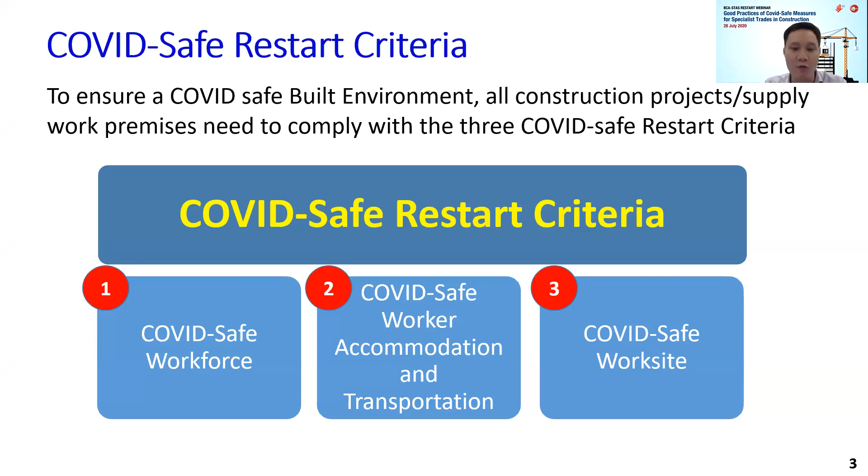All right, first of all, to date, we have approved about 3,000 work sites or supply work premises for restart. So based on all these restart works, we need to ensure that there's sustainability in terms of ensuring that the sites and the work premises continue to implement the correct measures. So these are the three broad areas that need to be looked at, which is the safe workforce, safe worker accommodation and transportation, and of course, the safe work site.

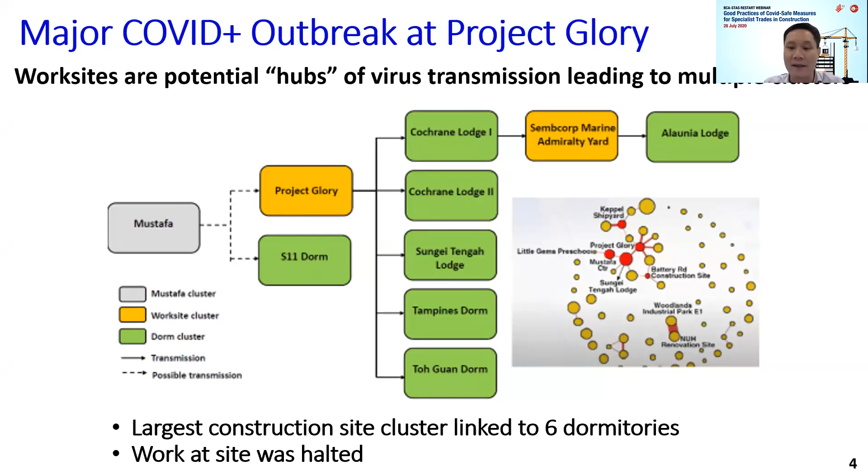Now, Project Glory, this is a reminder for us of the risk that can actually happen. It's a site where there's an arrangement with worker accommodation and work site, linked to 6 dormitories. So when there was an infection, it became the largest construction site cluster, and it reminds us of the risk of COVID.

Currently, there's no vaccine or medicine for COVID. So the real protection we have is to implement the safe management measures, SMM, and to contain any spread quickly when it happens. How well the SMM are observed will be key to avoiding outbreaks at work sites. So BCA has set up an audit and inspection, A&I, team to check on the effectiveness of implementation at the work site and supply work premises. The key objectives are to ensure safe access, safe distancing, and containment.

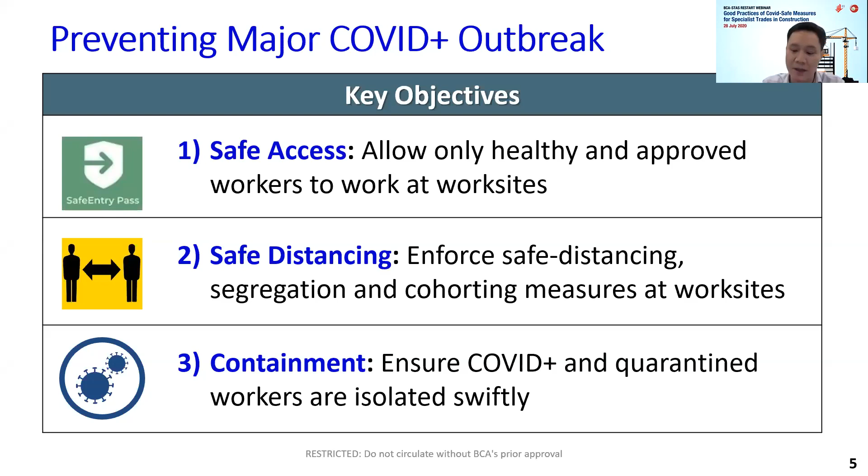So how do we do that? For safe access, essentially what we want is a robust entry control system to make sure the workers who go into the site are actually approved personnel. So if these personnel are ensured to be safe, this aspect is controlled.

The next aspect is safe distancing. This is not unlike what we do in the community. We have safe management officers or safe distancing officers to ensure workers at site are kept within a distance while they work or rest. There will also be segregation of teams and work zones, and when it's time for meals, we want pre-packed meals, and of course to turn on the Trace Together app. So essentially, this is the safe access and safe distancing measures that we want.

So if all this fails, the next aspect we look at is containment. Containment looks into how, if there are suspected or even confirmed cases, what response plans you will have at site.

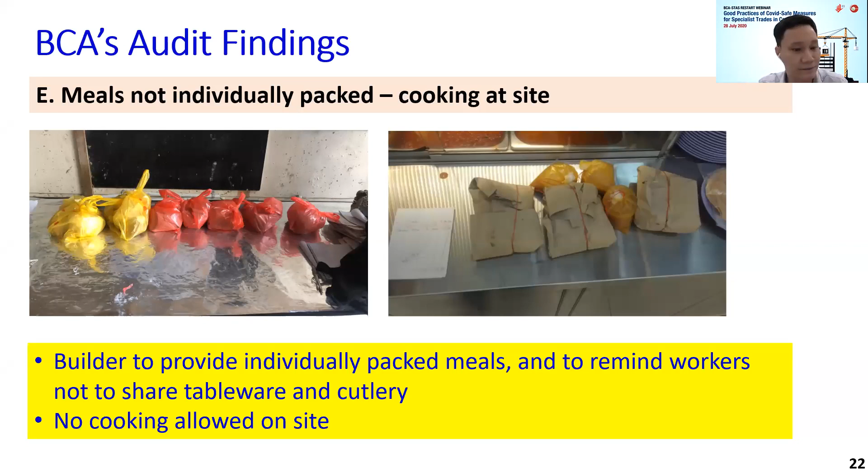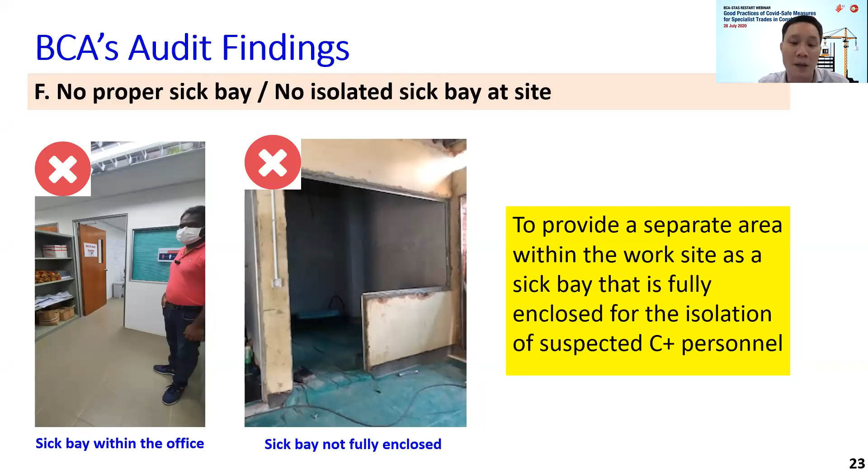Next, no proper sick bay, no isolated sick bay at site. In the event that a worker is found to be sick or infected, there must be a place dedicated for the workers to rest while follow-up action is done to extract him to the clinic. This sick bay should be an isolated place, and it should be well ventilated for the workers' rest.

Now, all personnel should also install the latest TT app on their mobile devices, which will facilitate traceability in the event of positive cases. So in the event that there is an infection, we can ensure proper tracking and tracing of the workers can be done.

I'll touch next on the good practices that we have found on site. These are some of the pictures you can see. There are dedicated entrances and exits for teams. This is something that even in our NTUC, in places of the community, you can see that there is a place to go in and a place to go out. So it's one-way traffic.

There are also clear safe distancing measures and markings done on site, and clear zoning as well. There are appropriate places for digital scanning of temperature devices where the workers can take their temperature daily. As I mentioned, communication is important, so SMOs should brief the SMM measures to the workers on a constant basis.

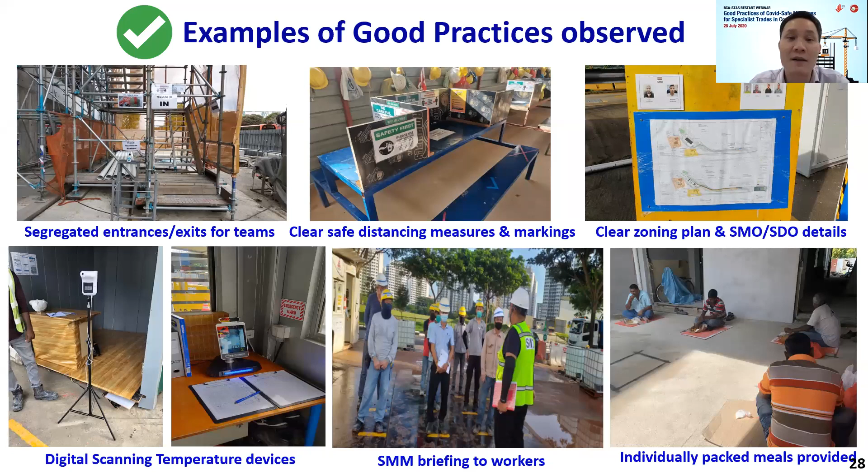And lastly here, showing that workers should also be given individually packed meals during their meal times. Okay, more pictures you can see of some examples of good practices.

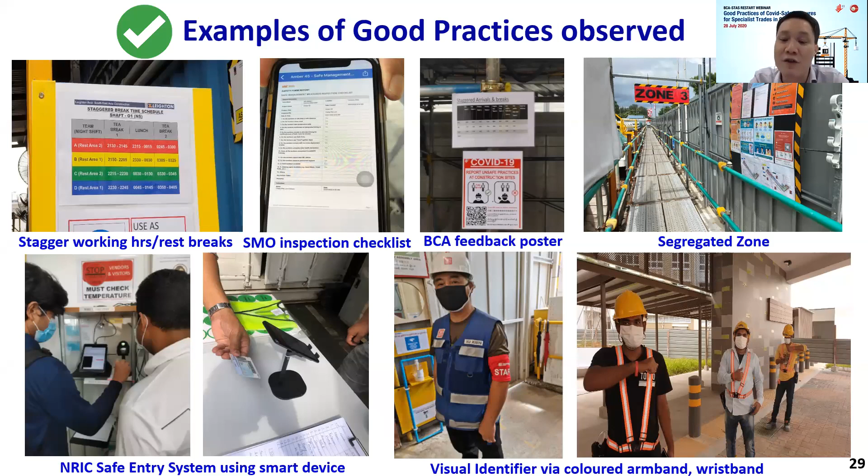We also have some examples of non-compliances. As you can see here, workers are not wearing masks during their work, and there are also situations where workers are found not authorized at site, and the sick bay is not properly provided for. We also come across workers who cook on site, which will end up sharing food.

So based on these non-compliances, based on our BCA audit, BCA will also take enforcement actions from very simple actions such as giving a timeout, stop work order. And if this were to persist, BCA will not hesitate to take up more serious enforcement actions such as giving fines or even up to prosecution actions.

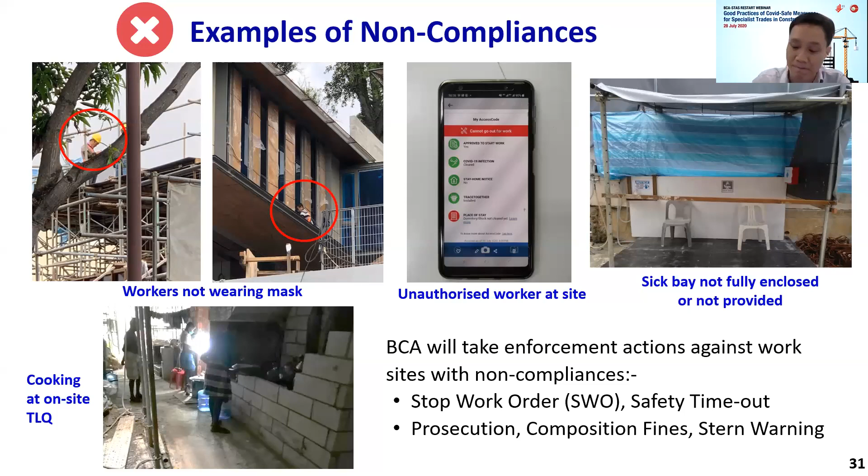So essentially, this is the whole framework of what our SMM regime is. That's all, thank you.

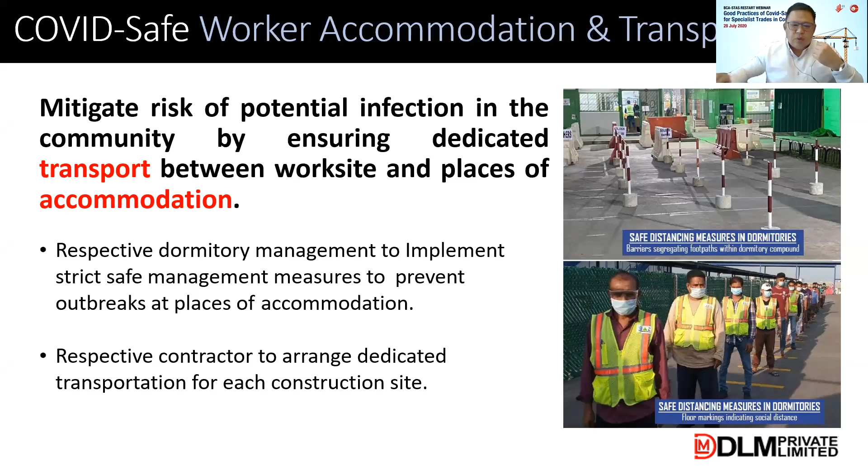On our end, and also for our subcontractors, we have to arrange dedicated transport for our workers, pick them up, and send them to each work site. One vehicle can only go to one work site, and then they will come back to pick up another group.

So we check our workforce. For example, this is a major chiller retrofit project. At the onset, we table out each of our trades and sub-trades, how many workforce we have expected during a particular month - like this is from 2nd June to 14th June - how many people are there from different contractors, and where they are staying. This checks whether they have complied with accommodation clearance, and whether the transportation is able to comply. We remind them how to comply at our onset briefing.

We also assign each of the trade contractors a color, so at the site their helmets will have a band stuck on. This is for us to ensure safe distancing, and when they've been segregated into teams, we are able to monitor them so there's no intermingling.

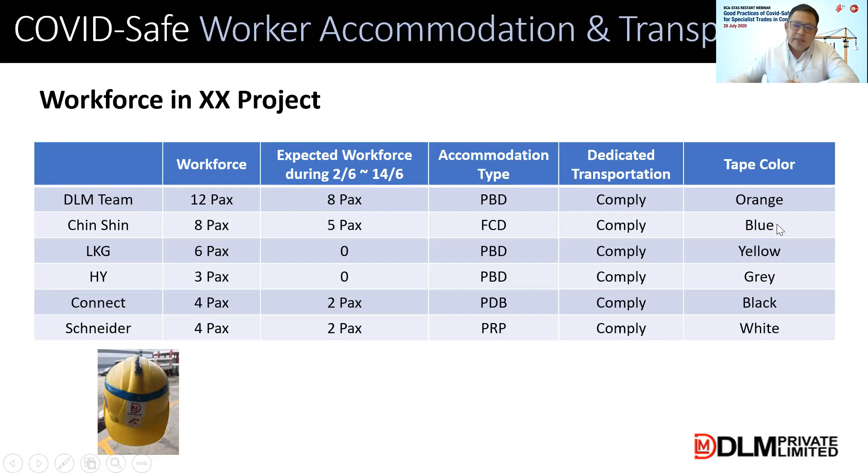At the accommodation, we have to ensure safe distancing between the beds, the rest area, and even for the basins and urinals - either they use alternate ones or unless they can achieve the safe distancing.

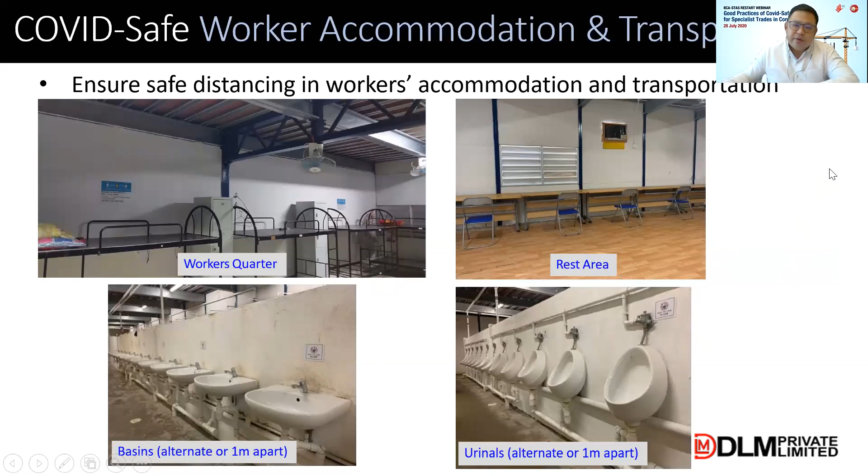In terms of safe transport, I think everyone is quite aware now. LTA has given, and also MOM, requirements to comply with 0.496 meters squared per pax. So a 10-feet lorry can ferry 8 workers.

Each trip can only bring workers to a particular site, and we make sure all the workers on the lorry wear masks. If you have bigger lorries, you can ferry more workers. When they reach each destination, we pass sanitizers and disinfectants to the driver, and the driver will disinfect the vehicle before heading back to pick up the next group.

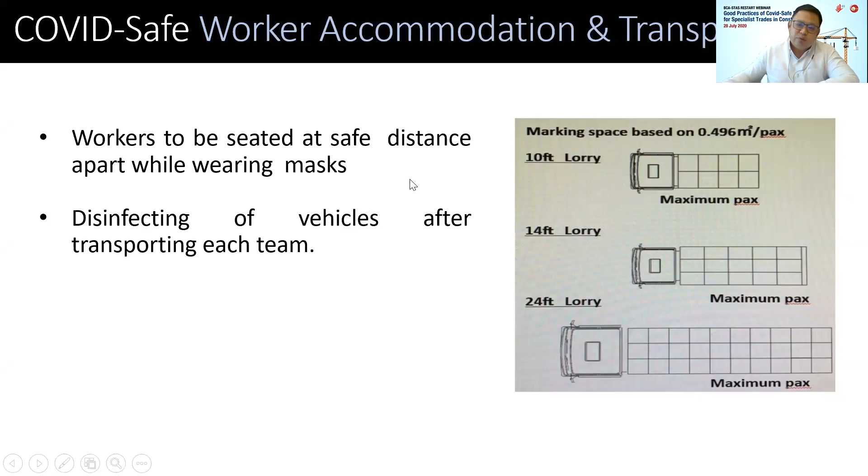Next, I move on to COVID safe work site - how do we manage that at our work site? We have our own SMO and SDO. The SMO is supported by the SDO in implementation on site, and each of the sub-team supervisors will be a COVID safe team leader, ensuring they take care of their sub-team on the site.

This picture here was just taken on 11th of July, just 2 weeks back. So we have a site where people are standing at safe distancing where we conduct toolbox meetings. We make sure that at this toolbox meeting, we tell them and remind them about safe distancing.

Whenever there are latest posters or infographics, we print them out in their native languages and put them at the entrances and rest areas, so the workers have a chance to be reminded and get updated about the measures and the importance of personal hygiene. We also pre-screen the workers' health status besides the access code and temperature taking before entering the sites.

You can have a temperature monitoring system like this. Workers take their temperature twice a day, and it can be recorded automatically, or you can use a thermometer to take their temperature and record it on a form. For the toolbox meeting, we have boxes where they stand at a safe distance. Also, for safe entry, you must use NRIC now in order to enter the site, because this is linked to the access code as mentioned earlier by Jeremy.

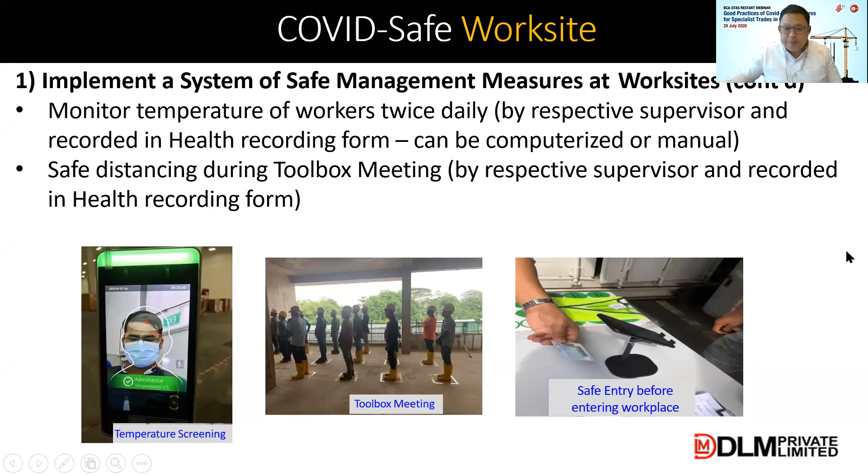So how do we actually reduce physical interaction? One way is to have staggered work hours for breaks. Some workers can come earlier, some groups can come at a later time, and they can also have different break times so that they don't all congregate at the rest area at the same time.

The important thing is we break them into teams, and each team can only work at a single zone. Later I will show you how we do it at one of our job sites. Each team is given a different colored tape on their helmet so it's easy for the SMO and SDO to monitor them.

For this particular project, every Tuesday and third Friday, the SDO and SMO will do a compliance check and also record any non-compliance and corrective action.

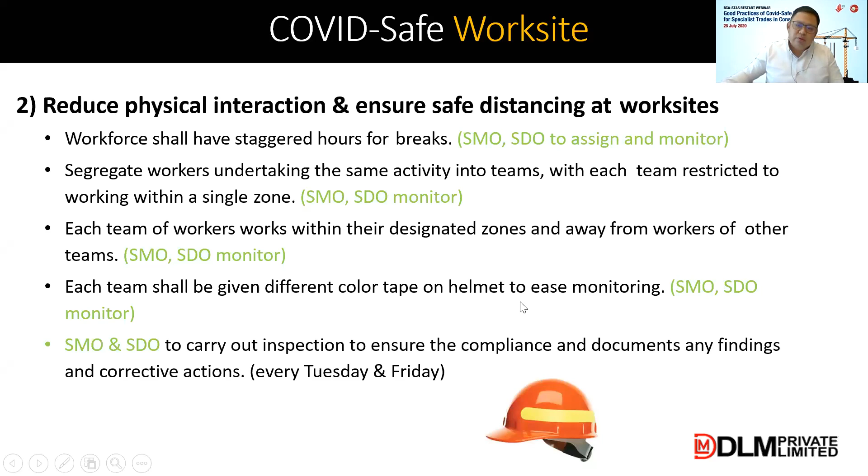This is one of our job sites where we're doing a chiller retrofit. This zone is where a particular trade group can work, and same for this zone - they will never intermingle. The SDO's job, through SMO's inspection, is to ensure that they don't intermingle. They are restricted to their respective work zone.

The following week there may be another change where this work zone and this work zone may interswap, or it could even be a change every 3 days. So depending on your workflow, you can start to restrict work zones at different timings.

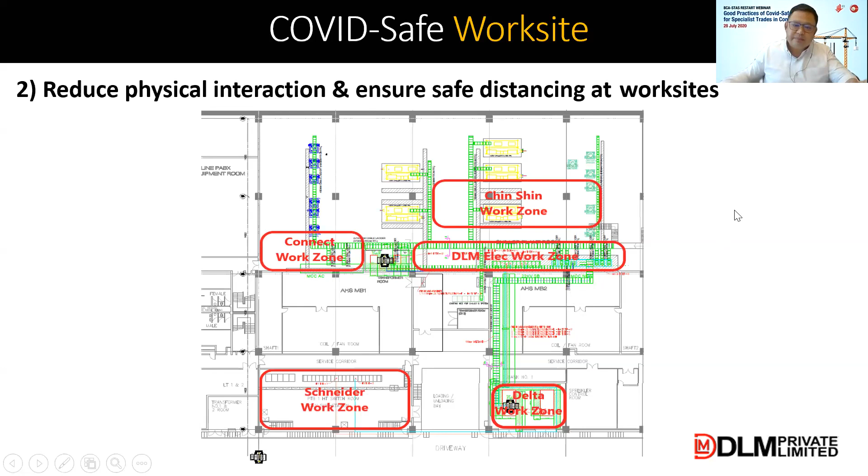We try to minimize our on-site meetings. If we can, we have virtual meetings. If we can't, then the meeting room needs to have safe distancing, same as the outside office, and we try to restrict the number of people that can be in there.

Cleanliness of the work site is also very important, so waste is always disposed of at the end of the day. There's a designated rest area - for example, a loading dock area where we can put up some barriers to designate a rest area. It must be well ventilated and have enough space for workers to spread out.

Sanitizers are provided at the entrance, and workers also use them to wipe down their tools before using them. At best, they try not to share tools - that's what we try to introduce, for every worker to have their own individual tools. But certain heavy duty tools have to be shared, and those will have to be disinfected before use.

Same for material delivery - they wear masks and keep a safe distance from the workers who take over the materials.

Basically, in my company's operation, I feel it was key that I quickly appoint safe management officers. Personally, myself, all my project managers, senior project managers, and directors have all gone for the SMO course held by BCA, and we've all been certified. So we know exactly what safe management measures need to be in place, and we can assist and support our SMO in the implementation of SMM.

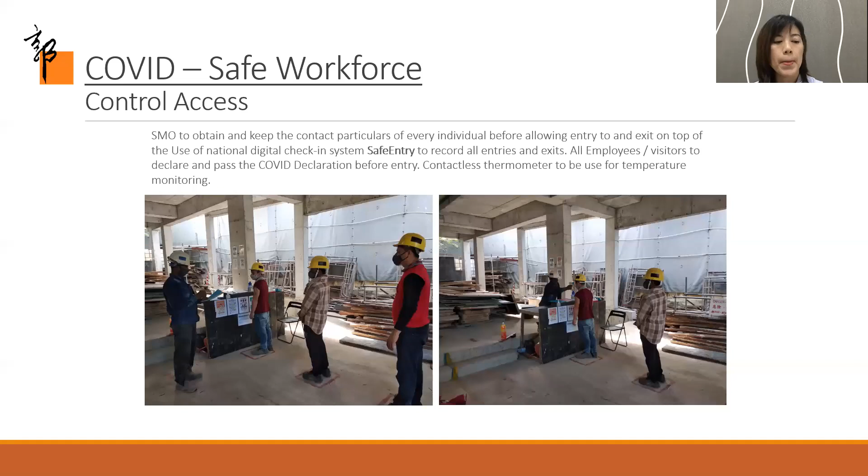You can see that at the SMO counter, and also on the walls, we put up posters to remind everyone about the safe and good practices on site. We also make sure there is sufficient hand sanitizer and soap at the wash area at each entrance and exit of the job site. The housekeeping is done twice a day, which includes cleaning up the job site, removing the trash, and disinfecting the area.

As mentioned earlier, we planned our work schedule and time schedule in advance to make sure that the job site is not overcrowded at any time. So the workers and subcontractors are given schedules to arrive at the job site. Different groups of workers arrive at staggered times, so that in each work zone only one group of workers would be there, and there's no mixing. Since our job site is small, we comply with a maximum of 10 workers at any one time, and the building is 4.5 stories.

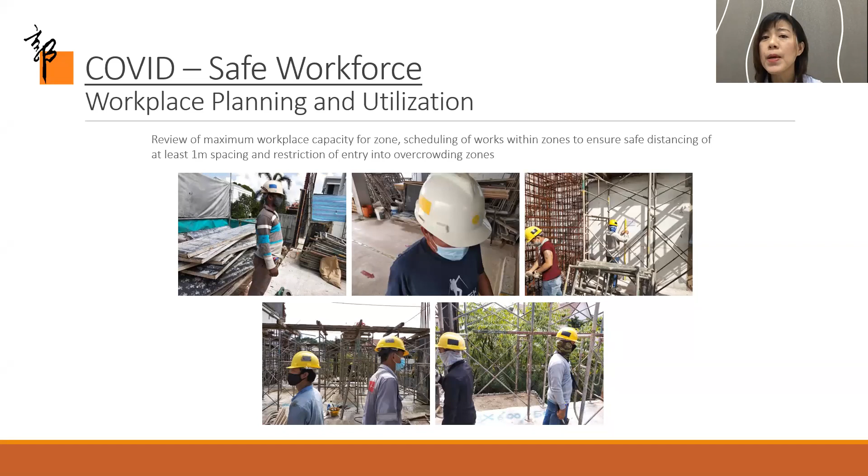So we divide the building into different work zones. Since our site is small, it's easier to manage: floor 1 is zone 1, floor 2 is zone 2, etc. Every floor is given a color code which we put on the workers' helmets. When workers arrive in the morning and check in, they're given color stickers by our SMO to put on their helmets. This allows our SMO and whoever is on site to identify workers easily, so we can monitor them and make sure they do not mix together.

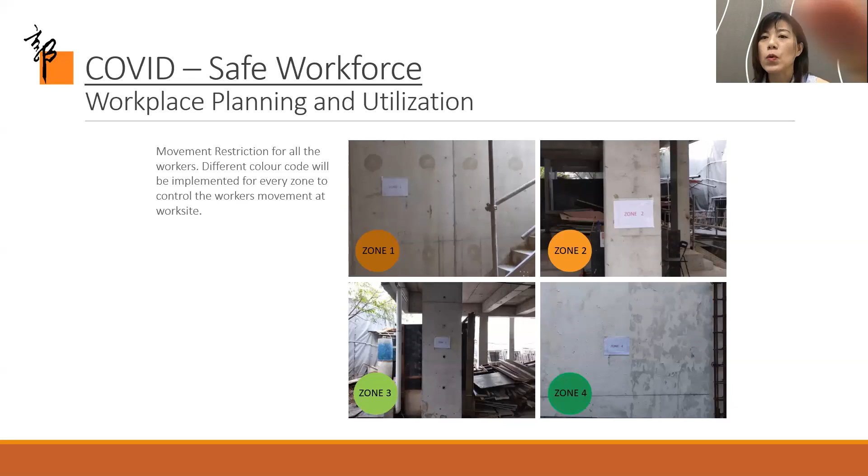In this slide, you can see we put up posters on the different zones to demarcate them, from zone 1 to zone 4, using different color codes. We have floor markings and also markings to show the traffic flow in and out of the job site, and up and down the stairs of the different floors of the building.

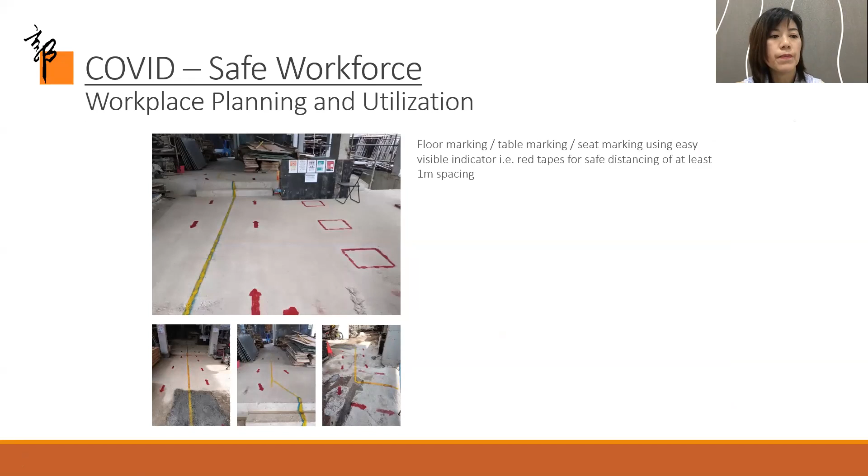With that, I end my slide and presentation. Thank you very much.

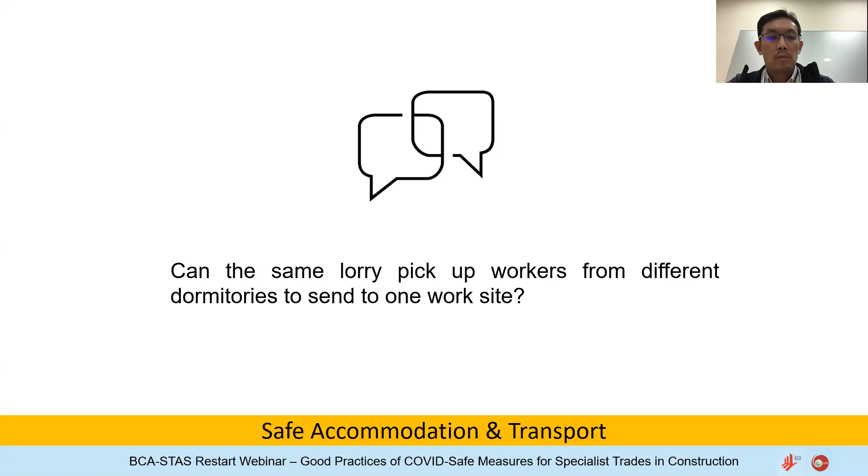Next question: can the same lorry pick up workers from different dormitories to send to one work site? The answer is no. If your driver wants to pick up workers from different dormitories, they have to do it in multiple trips. Each single trip should only have workers from one dormitory.

Does the driver need to be staying outside dormitories? Is it okay for the driver to be staying within dormitories? Yes, it's okay for them to be staying within the dormitories.

Next question: is it all right to have workers staying in the same room in the dormitory but working on different project sites? According to the updated cohorting requirements, we can have cases where workers working on different project sites stay in the same room in the dormitory, but this will be limited to workers considered part-time. You can go to our BCA website and read up on the FAQs, which were recently updated on the 21st of July.

Can an S-Pass holder, or in this case construction engineers, stay in the same HDB unit as other tenants not from the construction industry? Currently, we don't have any requirements that disallow this, but we strongly discourage workers from other industries or sectors staying with construction sector pass holders or work permit holders. We might also be working on disallowing this in the future to continue to bubble wrap this a bit tighter.

Do S-Pass holders working for renovation projects require dedicated transport? The short answer is yes.

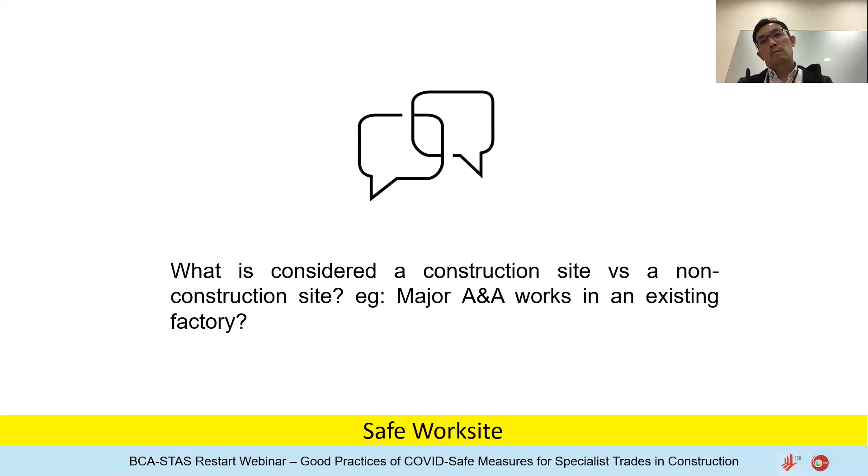What is considered a construction site versus a non-construction site? For example, major addition and alteration works in an existing factory. Construction sites or projects are defined as works that require building plan submission and permit to commence work application to BCA, where there is a project reference number that begins with an A or an E. So if works require submission to BCA, it will be considered a construction project or construction site.

Can specialist trade contractor workers use toilets at the construction site? They may use them if there's a dedicated toilet allocated for them. As much as possible, they should not share toilets with the other cohorted workers of the project. This is to prevent possible cross-infection between the main workers and the workers from the specialist contractors. Yeah, that's all.